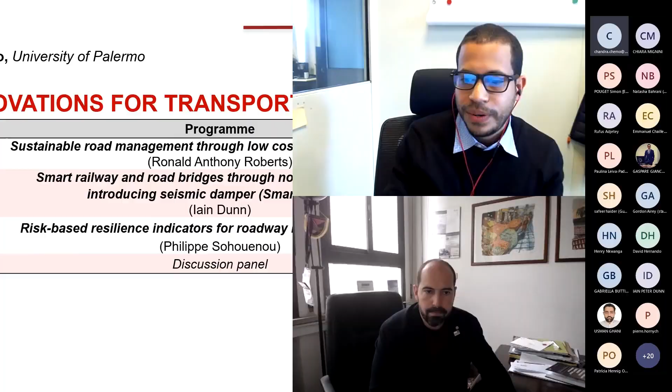Hi, good afternoon, Prof. Good afternoon, everyone. Can you hear me? Hello? Yes, we can. Okay, great. Okay, so can you see the screen? Yeah. Okay, great.

Good afternoon, everyone. I guess for the last time, I introduce myself. I'm ESR number 12, Ronald Anthony Roberts. My project was entitled Sustainable Road Management Through Low-Cost Techniques, SuRoMa, if you will. And as Prof said, I was supervised at the University of Palermo by Professor Inzerillo and, of course, Professor Di Mino. Just to give you a background of why this project was important and what was the motivation for it, it was basically to help road managers.

Essentially, road managers all around the world have a lot of questions to ask. They want to know which roads do they fix, when do they fix these roads, how do they fix these roads. They have a lot of questions, but they don't have a lot of solutions. The project was built basically to answer these questions, providing them with cheap, but at the same time, accurate and sustainable techniques and systems, so that they'd be able to answer these questions and have better pavement management systems in place to properly manage their roads and have better conditions throughout their networks.

With that in mind, the project had basically 3 main concepts, the first being using data analysis to look at limited data sets to understand historical and future road maintenance interventions. The second being to consider the subjectivity that is involved with detecting pavement distresses and to try to find novel methods using image-based 3D modeling. And then the final aspect was dealing with deep learning to try to detect and pinpoint pavement distresses within a network. I'll go straight to the first concept.

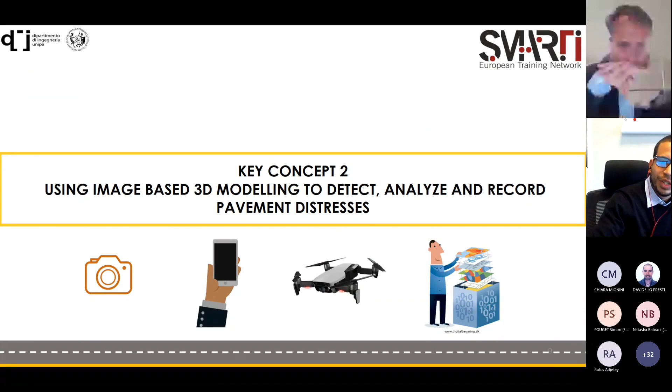I'll go straight to the second concept, which is basically dealing with 3D modeling and image-based detection systems. But before we got into that 3D modeling, we had to understand exactly how pavement distress is measured. So we took the different manuals from across the globe, all the way from Australia to the US to Europe to all the different continents, to understand exactly how pavement distresses are detected and how they're measured.

And with that, we came up with a methodology of what was important in each group and what characteristics you require for a new technique. So before we can launch the image-based systems, we have to understand what exactly it is. And more data can be found in that paper you'll see at the bottom there.

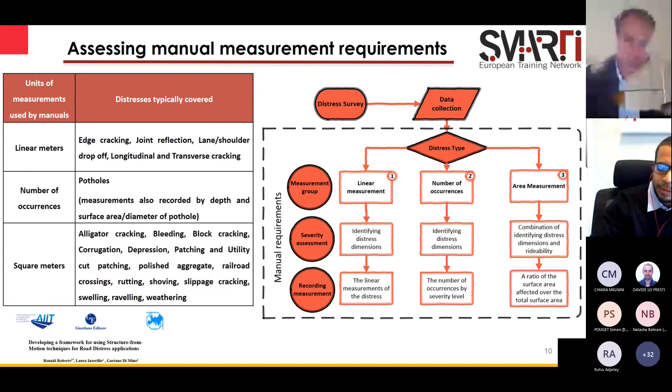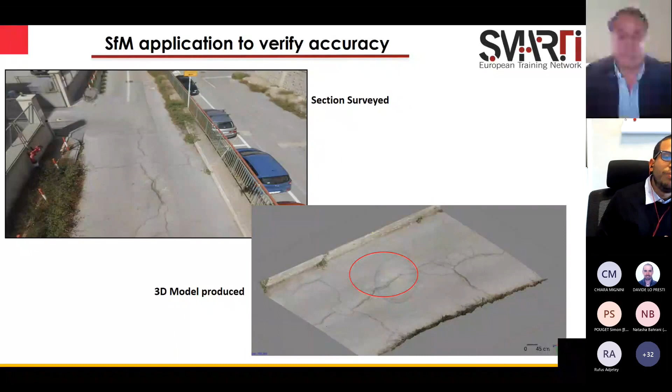So with that, we went straight towards structure from motion modeling, dealing with 3D models, basically, which takes 2D images that are collected in an overlapping manner. And using that, you could predict a 3D model of the actual distress and, basically, of anything really. So what you see there is just an image of the pavement at the top, and then at the bottom is the 3D model that was created basically just from those 2D images.

With that in mind, you could then take the 3D model and you could have cross sections along it. You could pick up a lot of really important information, such as the depth, the volume, the area, and you could have this along the entire section, basically creating a huge asset for the pavement manager that will be very useful. And again, more details can be found in that paper.

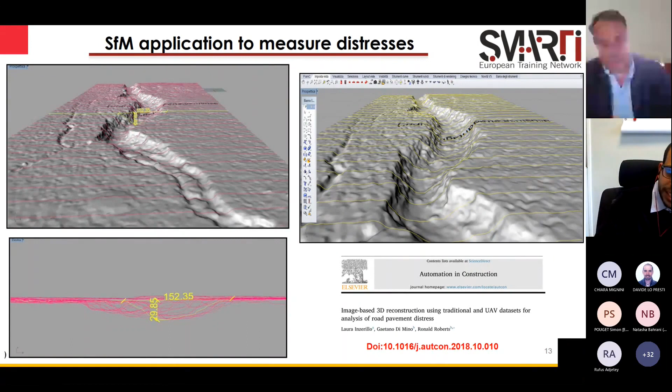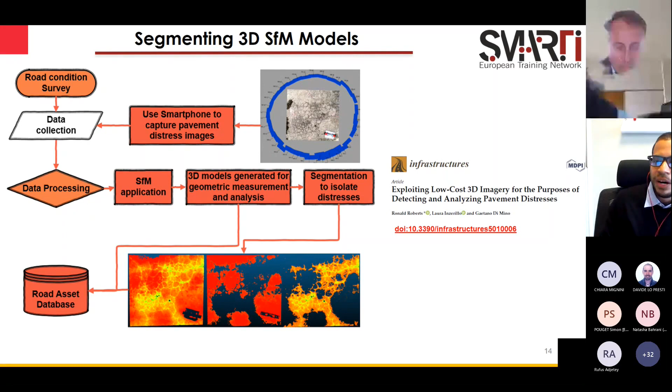The next step was basically segmenting those 3D models so you could isolate the distresses within the different sections. So you could easily pinpoint which sections have the distress, the area that is affected by the distress, and the level, the depths. It's so much information that you can take from a 3D model versus just those 2D models that you have. Again, more data is there in that paper that you see there.

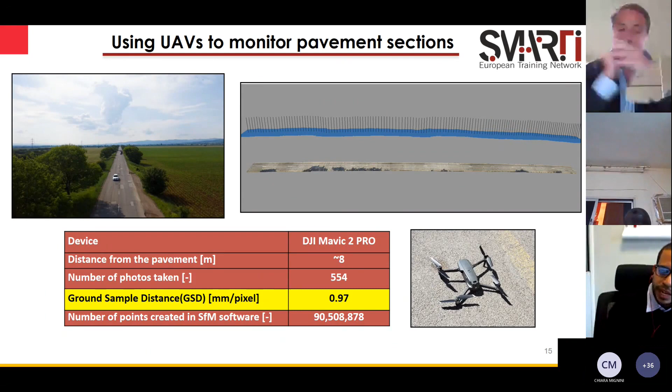And with that, we came up with a methodology where you could use that information and have an analysis of the average level of distress over the various sections. So you see that same section there. Now we can model it, and basically you have all of the areas that have distress over it. You have the average level of distress for the entire section. You also have which subsections have more distress.

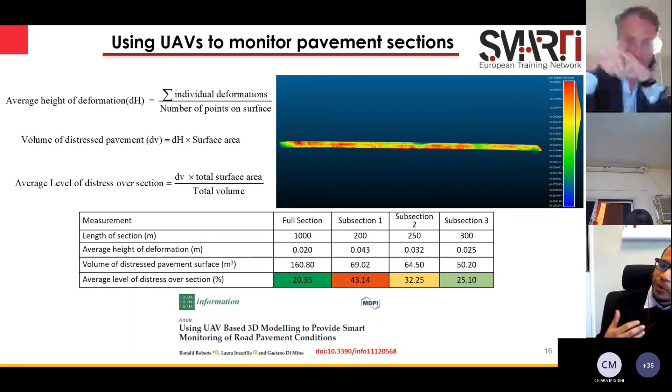So basically, if you did the survey in a large landscape, after carrying out the analysis, you could have a fairly good understanding of what exactly is happening within your network, and you could replicate it and keep storing that data over time to produce more data for your asset management.

And then finally, the last concept that I'll talk about dealt with deep learning. We did this in two contexts, the first being in Italy. Actually, Gaspare helped me out a lot with this. We had a camera that was embedded in a smartphone, and he drove around Sicily a lot, basically collecting images, building a giant database, which I then labeled based on the types of distresses that are available, and using that, created a deep learning model that was able to detect where the distresses are within a network.

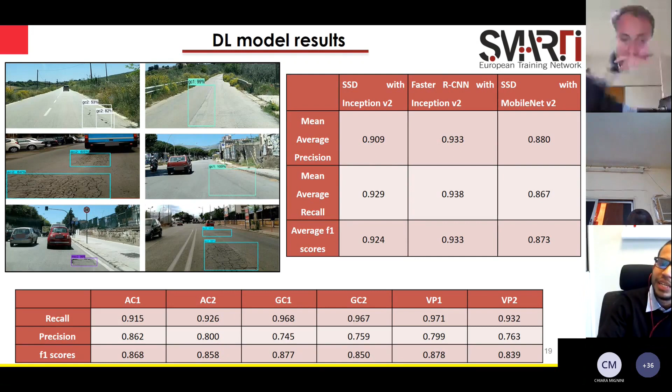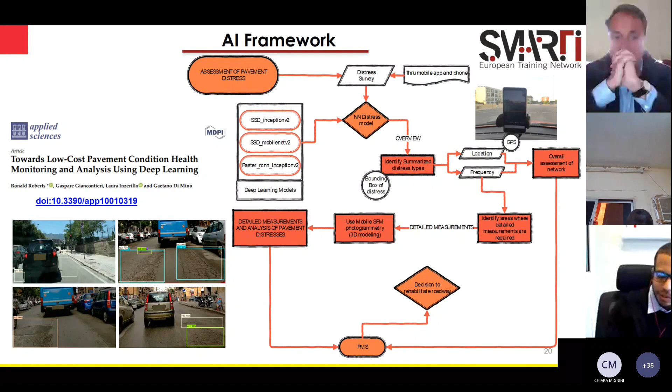At the top there, you'll see some of the examples of this using some real-time images, and the accuracies we got were pretty good, identifying that the process could work, especially for this scenario. And again, it gives you this information in real time. You can also do it afterwards, after the survey has been done. So there's a lot of opportunities here. We worked this out into a framework that you see here, but again, more information can be found in that paper if you want to find out more about that.

Then the next step was to consider it in a different context. And for this, I considered my images that I procured during my secondment in France. And basically these images were different because they were from a top-down perspective. And we also considered different types of distresses for this. But the idea was to use the same methodology to see if we could make it work. And we were also very successful in doing this.

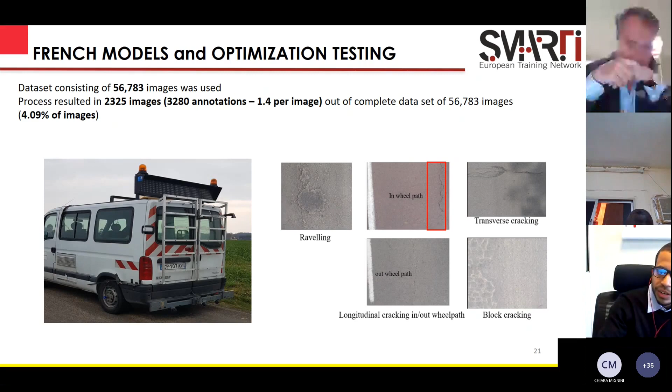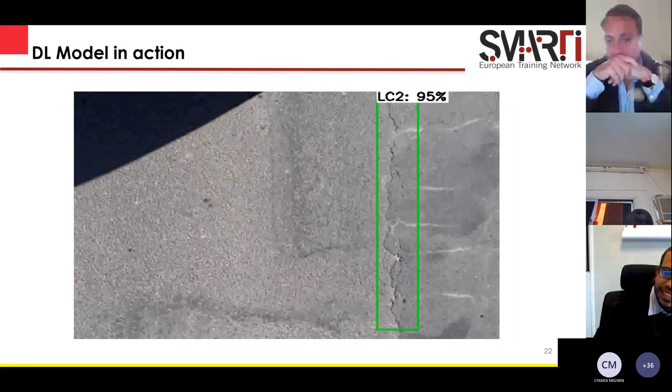I'll just show you a few of them in a video, in real time here. You see that some of them are being missed, but at the same time, it gives you an idea of what is possible with this sort of technology and these sort of results. So we were pretty satisfied with this, and we also did a lot of optimization and augmentation that are not shown here, but you can find a lot more information on that in the thesis and in papers that I've done.

So to conclude, I like to think of it as considering two different aspects with two different questions. If you have a need as a road manager to have pavement distress data and understand the maintenance timeline, you can look at the data and analytics part, and also the deep learning with the phones. But if you want detailed metric analysis, that's where photogrammetry comes in, with structure from motion and 3D modeling. The idea is that you need both to give you the answers for your pavement management system, so road managers can help their networks and have fewer questions to answer. With that in mind, thank you for your attention, and I'm happy to answer any questions at the end. Thank you.

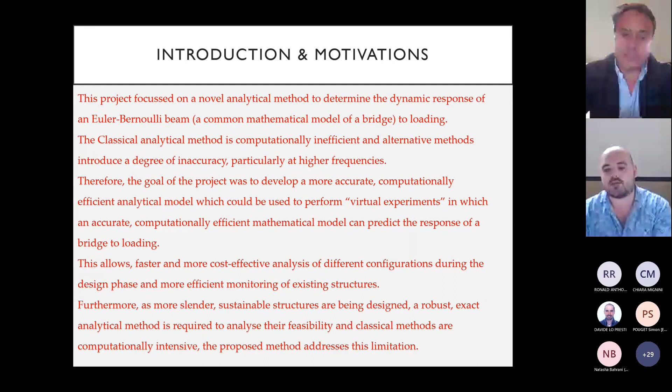The goal behind this was to be able to perform what we call virtual experiments. Essentially, this is when we have a mathematical or computational model that is so accurate that it allows us to test new designs, new materials, new types of attachments. Rather than doing in situ testing or small scale testing, we can use the computer model and be very confident in our results. This also ties into sustainability. If we talk about new structures under design using more environmentally friendly materials, or even slender structures to save on the amount of materials, we want to be confident that these will perform as well as traditional structures.

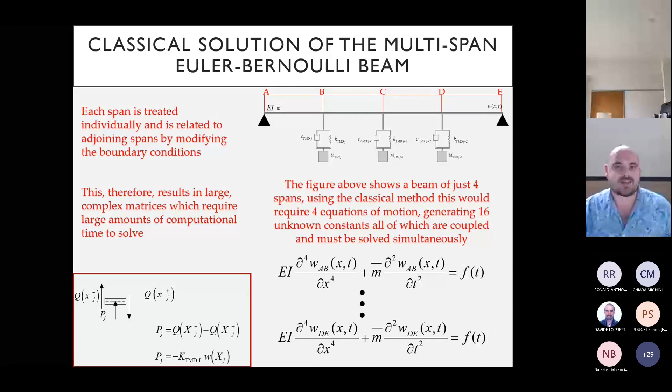This, I'm not going to go into too deeply - it is the classical solution method. The only takeaway I want you to have is that if we look at this beam here, which is a relatively simple model of a bridge, it's 4 spans long, it has 3 tuned mass dampers. In this case we would need 4 individual equations of motion, which are of course coupled, and then we would have 16 unknown constants from these equations of motion. All of these must be solved simultaneously, and as you can imagine, this takes a very large amount of computational power to do. And this is a simple case - in real world applications you're looking at beams with far larger spans. So in this simple case, you're still talking minimum 1 day to conduct the analysis, and that's when the model was already prepared. This is just the time for the computer to conduct the analysis.

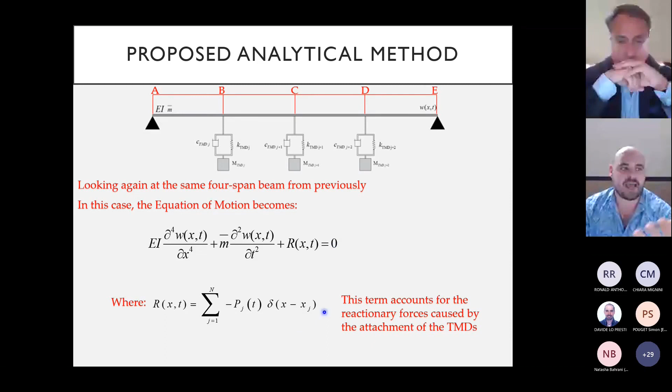That is the term that accounts for the reactionary forces, and it's expanded here. Of course, it will be different depending on what our attachments are at these points. So a further expansion was then proposed, which we called the helical spring model.

Typically in a tuned mass damper, we do not consider the mass of the spring. The spring and the damping element are considered to be massless. All of the mass is contained in the lumped mass. However, obviously, this is not how things work in the real world.

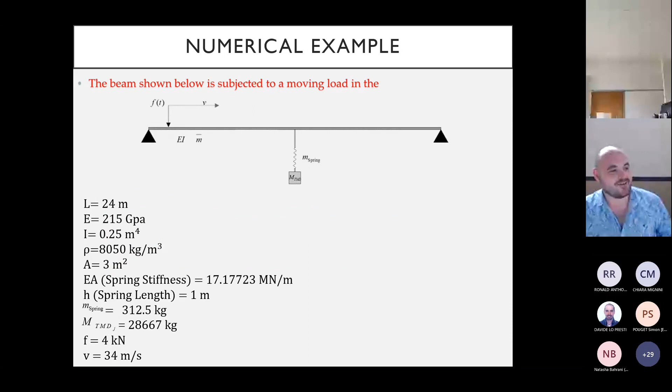So this is just for the sake of knowing exactly what parameters we have, but these are the numerical results. So validating with finite element analysis, you can see that we have a very good agreement between the results from the helical spring model and the lumped mass model.

And then looking at the graph, you see that the response is very, very similar, but that the helical spring model does seem to outperform slightly the spring mass model in terms of maximum deflection, which may be expected as we have a higher mass that's been considered.

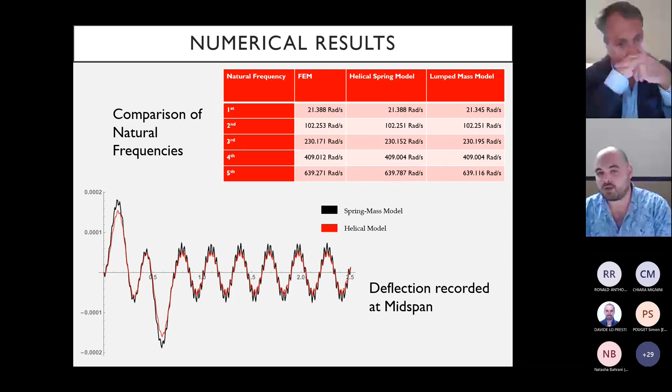This is just to say that the model does have some advantages over the classical way of modeling a spring. However, it's debatable whether or not that is worth it for the extra complexity.

The next stage that we moved on to was Poissonian loading. Poissonian loading, as it says here, is a special case of random loading in which the loads arrive with random magnitudes at random times. The reason we did this type of analysis was because it's similar to traffic loading that we would see on a bridge.

Typically vehicles traversing a bridge will arrive at completely random times with completely random magnitudes. However, they will be moving at roughly the same speed and in the same directions. So Poissonian loading can be quite a good method of representing this.

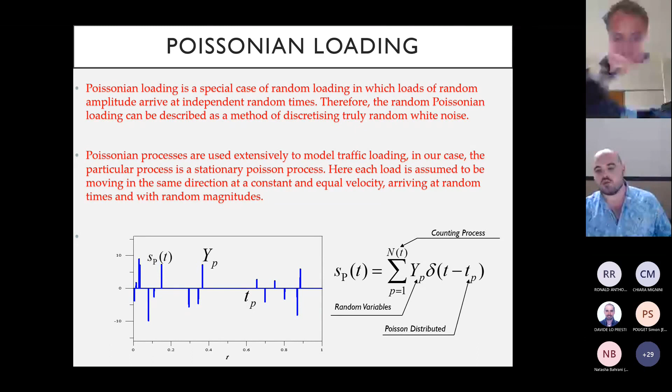The application to the beam is shown here, where instead of F of t, we have our Poissonian load as a forcing action. As I mentioned, we have the independent variable, which is the amplitude of the forcing actions. We have another random independent variable, which is the arrival times. And then we have a counting function, Dirac's delta, to localize where the force will be at a specific point in time based on the velocity, and a window function to remove the load once it's traversed the bridge.

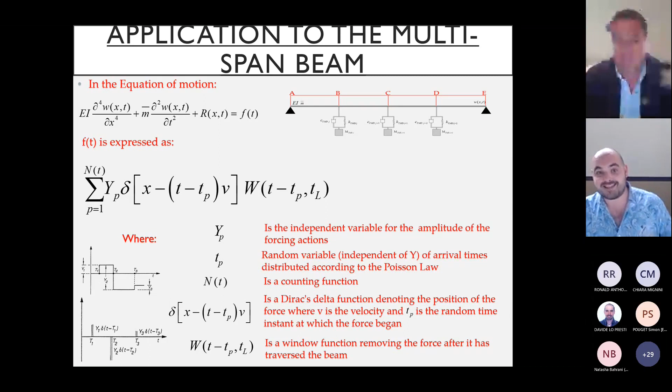But I'm not going to go too much into detail on that either. So we then moved on to conducting some experimental analysis in the laboratory here at the University of Palermo. And the purpose of this experimental analysis was more for our own confidence that our analytical methods were working.

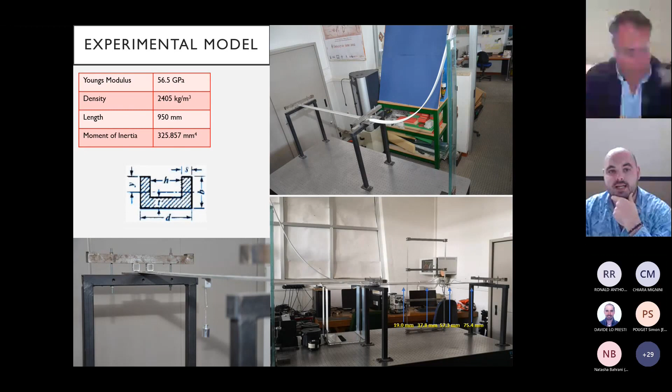So this here shows the setup, and you can see that we also have an attachment at the midspan here. Here we see the locations of the contact accelerometers used to obtain the results from the experimental analysis, and the results are shown here.

You can see that there is very, very good agreement between the two, the discrepancy never going higher than 1.75%, so always under 2%, at least considering the first 5 modes. This is, of course, what we would like to see.

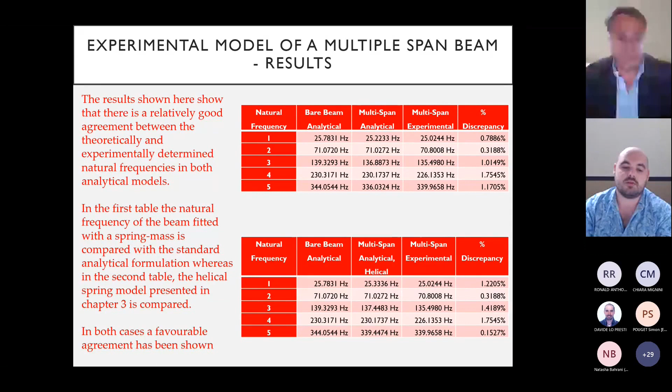And here we see that the analytical method using the classical representation of a tuned mass damper is slightly less accurate at times, but also perhaps slightly more accurate than the version that uses a more accurate helical spring model. But it's our belief that this is most likely due to inaccuracies in the design of the small scale experimental model, because we did have to do a rather large amount of system identification once it was built, due to the materials not matching properties that they should have.

So to conclude, and again I'm sorry for the wall of text, we first developed a novel method. This formulation has significant advantages over the classical formulation, particularly when it comes to the equations of motion.

The extension to the model in terms of the helical spring model was presented. We then subjected it to Poissonian loading to introduce a stochastic element. And finally, we had results from an experimental campaign.

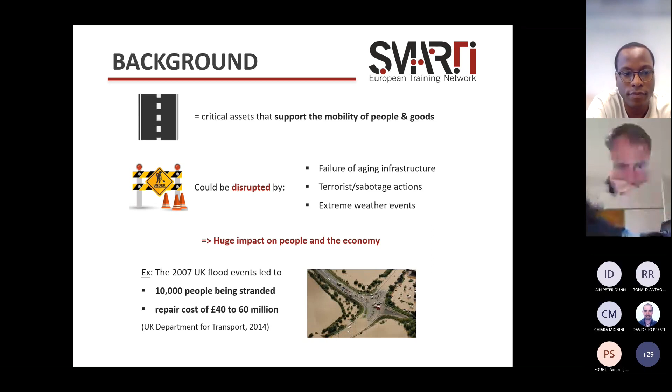Based on this, society needs resilient road networks. By resilient I mean able to sustain and quickly recover from disruptive events. However, current transport planning, modeling, and management standards provide little guidance on resilience. So the aim of my project was to develop guidelines and modeling tools to support decision makers in predicting, assessing, and ultimately reducing the impact of disruptive events on a given road network's performance.

I will quickly go through the project methodology, then provide some studies and results, and finish with some conclusions.

First, the methodology: the idea was to develop a more accurate and meaningful method for quantifying road network resilience, in particular considering multiple possible disruption scenarios, then apply these methods to case studies, including artificial and real networks, to test and validate the methods. We also used the case studies to explore the effect of network characteristics, like size, topology, and demand distribution, on network resilience, and the effect of repair strategies on network resilience.

First of all, if you look at the literature, there's a lack of consensus and rigor in the use of the term resilience, because it is used in different disciplines like economics, ecology, engineering, and psychology, which all adapt it to their needs. It also overlaps with other concepts like risk, robustness, and reliability. So the first thing I did during my PhD was to look at this and summarize it.

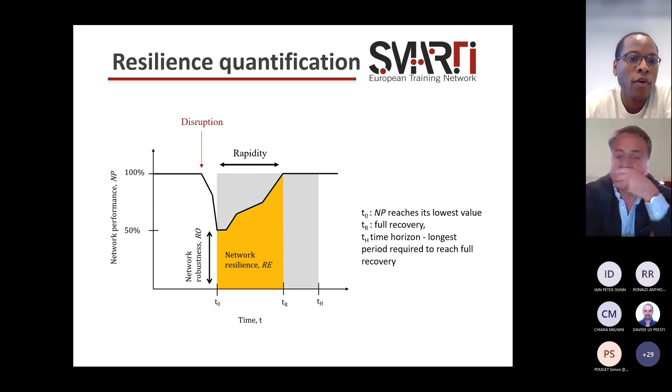Now we look at resilience quantification. This graph shows how the indicators are developed and how we can measure resilience. There is network performance that is normal at the beginning, then a disruption happens, so network performance decreases until a certain level of service—this provides a network robustness indicator. Then you look at how quickly the network is able to recover its functionality, which provides a rapidity indicator, and the combination of both provides network resilience.

idea of my model is to use an event-independent model. So basically, we don't look at the causes of the event, but at the consequences. And to repeat the process for several damage scenarios, and then look at statistical analysis to compute what will happen in a lot of different scenarios and understand the resilience of the network to multiple scenarios.

And the idea of the network performance indicator is to compare the normal and the disrupted travel time on the different origin-destination pairs in one network. It uses a weighted average computed across all OD pairs, which basically gives more importance to the highly demanded OD pairs. It's scaled between 0 and 1 for clarity. And basically, compared to indicators that are often used in the literature that are based on total travel time losses, it's able to discriminate between a lot more scenarios.

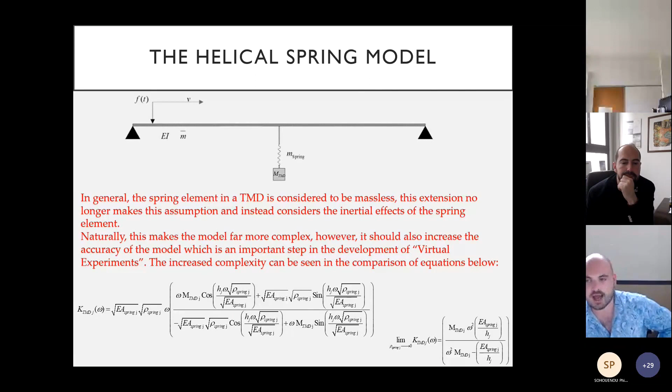But I guess the complexity is in developing this rather than the analysis. At the stage in which this is analyzed, you're considering the free vibration problem. So you would have an equation for how the beam would react in free vibration, and that equation is constant no matter which type of loading you apply. It's worthy of debate whether this added complexity is worth the increase in accuracy you get. But once it's developed, there is little more complexity added in its implementation. So I see no reason not to use it. If that answers the question.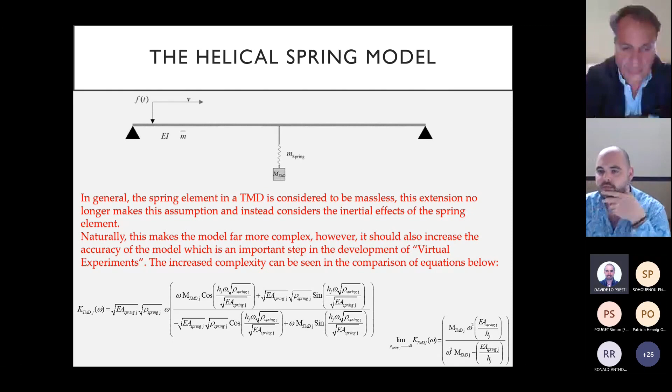Thank you. I see a raised hand. Please, the question. Henry. Henry, we can't hear you properly. I think maybe the mic isn't folded down. Can you hear me? I've got a headset on. We can hear you faintly. Can you hear me now? Better. Henry, please, the question.

Thanks for the presentations, Ronald, Philippe, and Iain. I've got two questions, one for Ronald and the other for Philippe. Ronald, just as a little background, I work more in developing countries.

I'm more in my line of work. I work closely with developing countries. So I just wanted to understand, Ronald, for your dashcam, are there any standard specifications? Because I find what you've done relevant to road authorities in developing countries. You know, that sort of intermediate level means of collecting data for road networks.

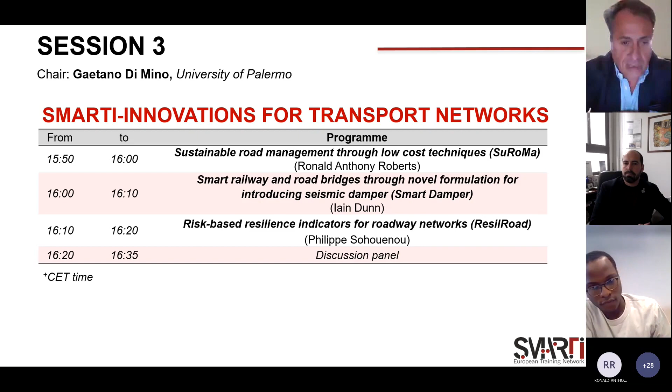Thank you, Gaetano. Thank you, all the speakers, and thanks for all you've done for the project. I'm really pleased to see that the fellows are now working on, possibly, the same topic they developed during their PhD or as researchers. So what was the aim of the project? To create a generation of researchers that could implement the vision, and it is actually happening, which is great. So really, thanks to all the fellows and to the supervisors that have guided them.